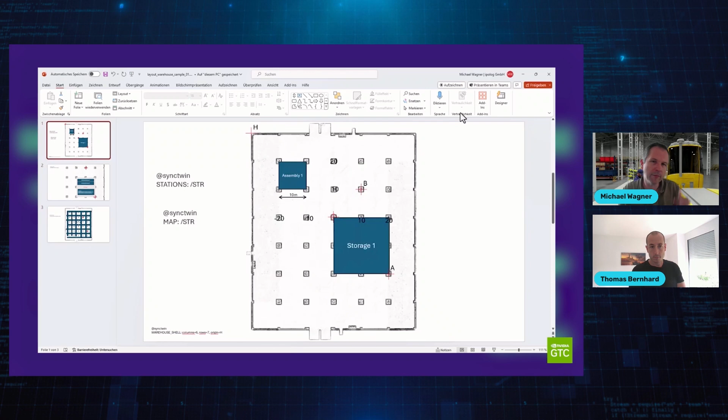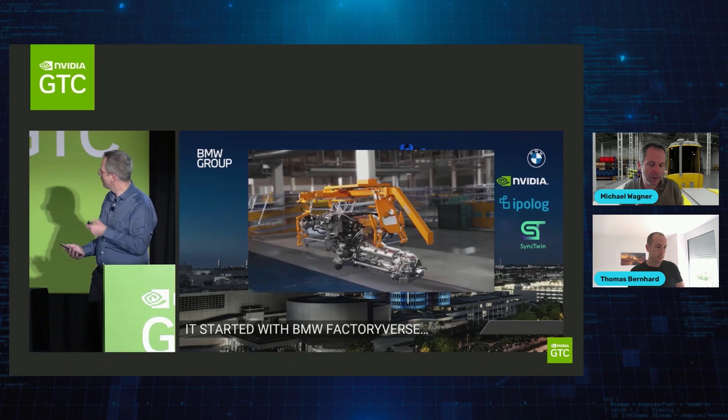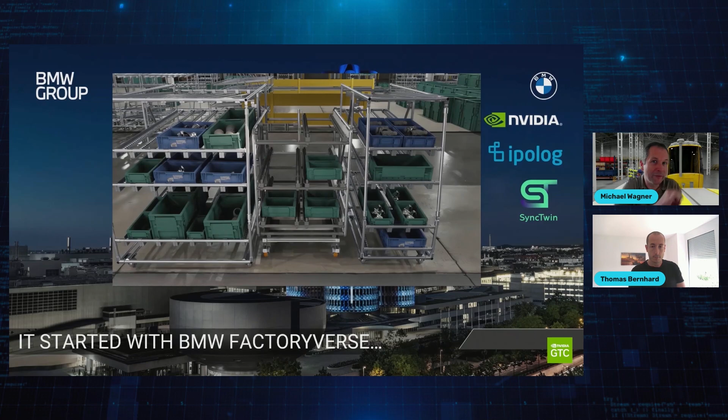GTC was great to see the adoption of Omniverse and the OpenUSD based workflow. As you all might know, Siemens was showing this big ship visualization. We had Amazon, Continental, and all the big players presenting their efforts, and it was great to see the adoption, but also the OpenUSD based workflow, and Aaron Luk got great insights about that. Something I'd like to add, because you always see the nice graphics, but it's just the tip of the iceberg, because the actual great thing is the OpenUSD structure and all the assets based on OpenUSD.

We presented there and launched our SyncTwin app. To give you a little insight, I'd like to re-show our video where we presented the vision of where we want to go, also with the AI assistant. Let's have a look.

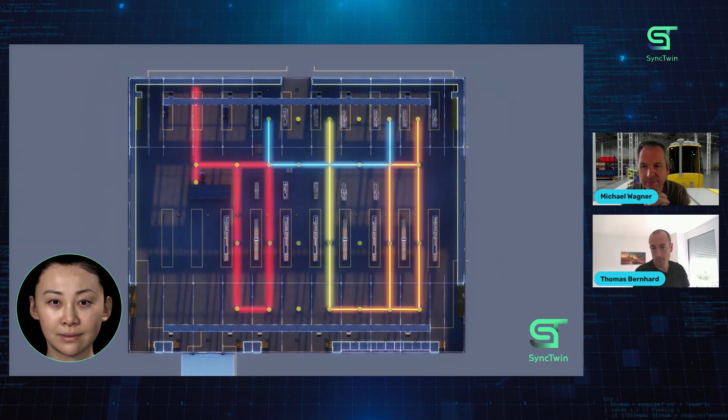Hi, I'm Lucy, your digital twin AI companion. The SyncTwin app, powered by NVIDIA Omniverse and OpenUSD, is your key to next-level digital twins like that one. Simply drag and drop your PowerPoint floor plan and Excel data into the app and see how your factory evolves. Need something specific? Just ask. For example, Lucy, create a pallet rack. Or, please add forklifts and loading units. Optimize your processes with tools like NVIDIA cuOpt, streamlining operations to deliver real value from your digital twin, to make smarter and more efficient decisions. Or dive into VR and become one with your factory, to understand and engage with your operations on a whole new level. Do you like to know more about what I can do for you? Connect with us on LinkedIn, Discord, our website or download the app on our store and get started. Together.

Yeah, I still like it a lot. I might add, this whole video was done in Omniverse, and actually the guy who did it was Thomas. So Thomas, could you tell a little about what components did you use? How did you do it?

Yes, sure. I mean, everything we built is on Omniverse. So the SyncTwin app is completely built on top of Omniverse, and we thought maybe just to video everything in Omniverse. For example, Lucy, the AI companion which I created, was done in Omniverse Audio2Face. It's basically a program where you can convert MP3 to movement of a face.

The whole creation process of the digital twin involved some work with the app itself to create networks, for example, or the animations where things are falling down, which are just timelines and event keys for when something should come down, and also the camera movement was automated.

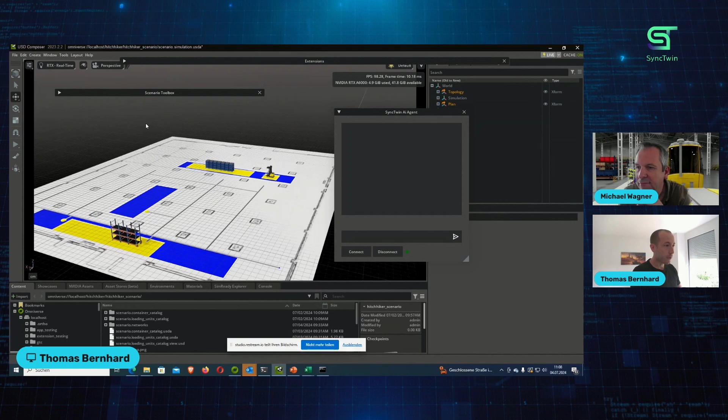Yeah, and I'd like to have Thomas share his screen. So as Michael said, the idea was that we use PowerPoint and Excel to create a digital twin, because everybody has it and everybody uses it. So I was thinking of just making a super simple example like this one, where you can see the floor plan in the background, and where you have the pallet rack generated with our pallet rack generator, adding some forklifts as 3D models, and some loading units and transport networks. So the idea is that we have different scenarios, and you have to put the files inside. And now I'm going to show you how a PowerPoint could look like.

So what we just have seen was the SyncTwin app. It's an Omniverse kit extension, so you can just download it from our web store and add it to your Omniverse Create, for example.

Now here in this PowerPoint, all you have to do is basically use your floor plan, which is PNG or PDF, load it into PowerPoint, and then draw some forms on top of it, which our software can understand. So it's a mixture of using forms and giving some commands. And with @synctwin, you tell the software, okay, now we want to communicate with our SyncTwin app. And for example, if you put this floor plan in the background, these different stations are added into the scene.

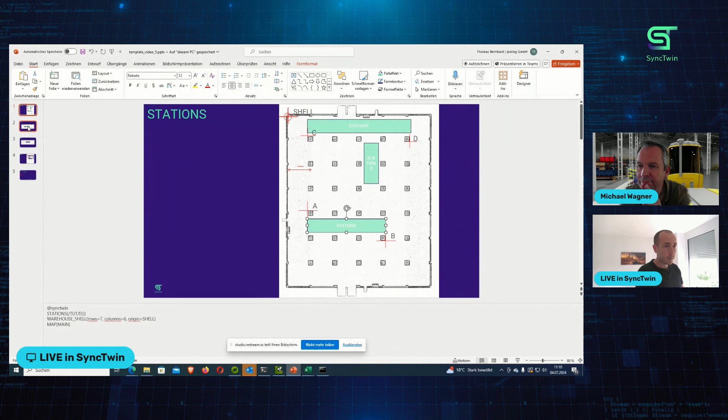Then, for example, if you want to add a 3D model like the forklift, just add a rectangle on the spot where you want it, and tell the location where you have it. It's in the nucleus, which is the base data storage for Omniverse. And then you tell where it should be, and this, for example.

And it's basically, if I may add, Thomas, you see this SyncTwin app as your assistant, and you basically talk to the assistant with your PowerPoint. So you tell this here and that here. And we'll see more of that later on as well.

Yes, and we are always trying to think about what would be the easiest way to actually get things into this USD format and into Omniverse itself.

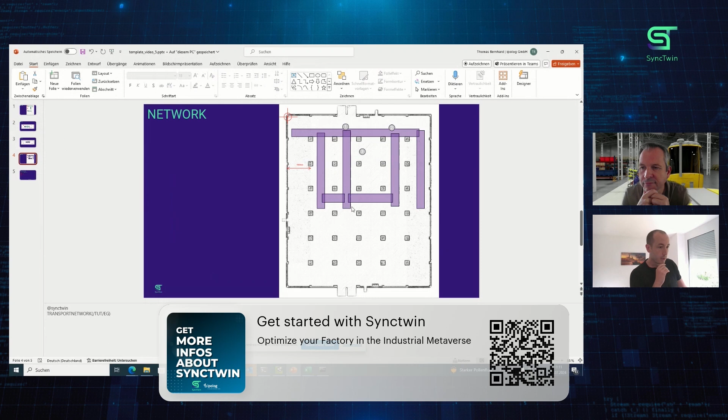For example, to create a network, all you have to do is take rectangles, put them onto the slide, and say, okay, it's going to be a transport network, and you can also add stop points with these circles. With this, you generate these transport networks, which can later be used as data for routing optimization, like with NVIDIA cuOpt, for example.

A further thing is creating pallet racks, like shelves. You just have a rectangle for the place where it should stay, tell it the name, and give the command: okay, we want to have a shelf, a pallet rack on the rectangle, and fill in all these parameters. With these parameters, the shelf would be generated, like the amount of levels or the height, these kind of things. So with the PowerPoint, you do a lot of placement of stuff, and where something should be and should be located.

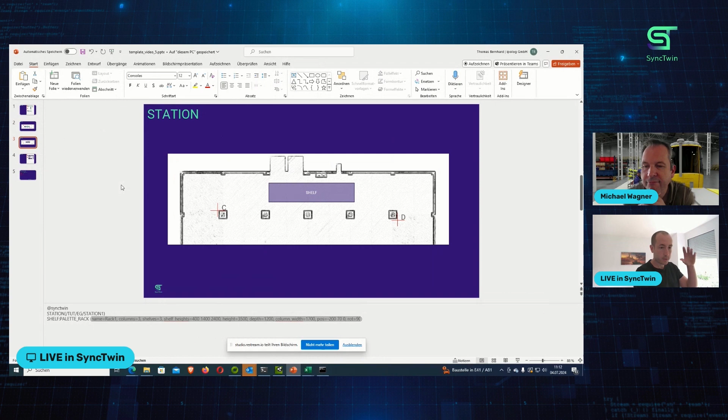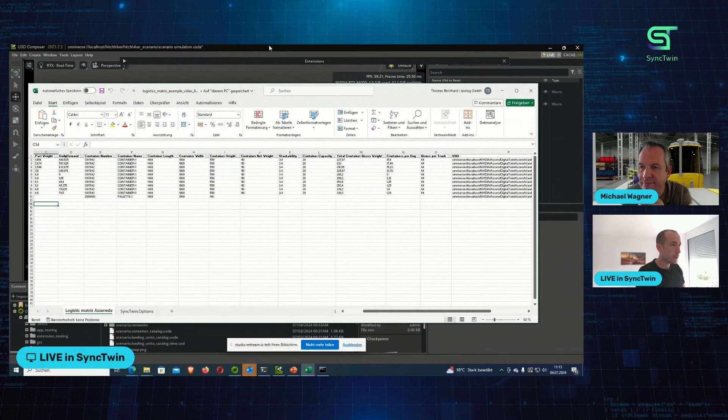You can also add Excel files into the Omniverse app. Just load it here. The Excel files look like this for loading units, like parts and containers. It's really simple data. We also have this example data in our tutorials if somebody's interested.

Then you can load this information inside the Omniverse app. You can also have a look for the containers, for example like here, and have a look at the different models and your data.

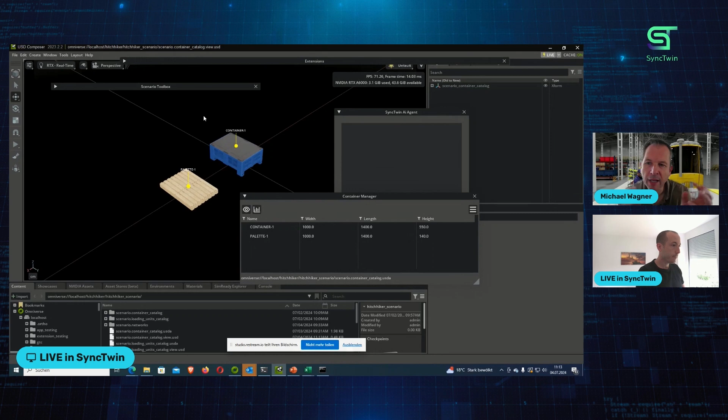The idea is to get the data in from whatever source you have and transform it into USD assets. So what we see here is basically the information about two containers, but also it uses template elements from Omniverse to create the visualization on top of it.

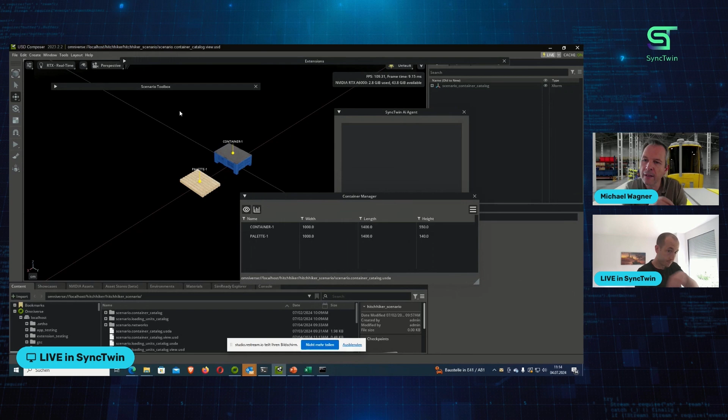So we see this is a pallet, this is a container, and so on. Both are basically in USD asset form. We can get the information about the container type or size, and the graphical representation, and we can combine this furthermore.

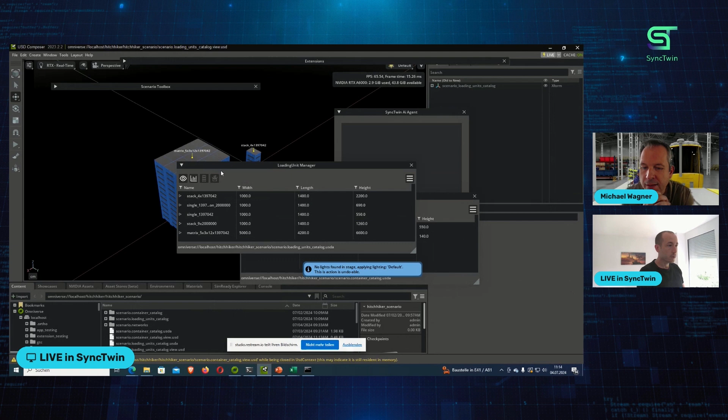The same is also true for loading units. It's like a combination of these different containers we have here. These are, for example, stackings of different containers, or a container on a pallet rack, or pallet racks stacked on top of each other, like here.

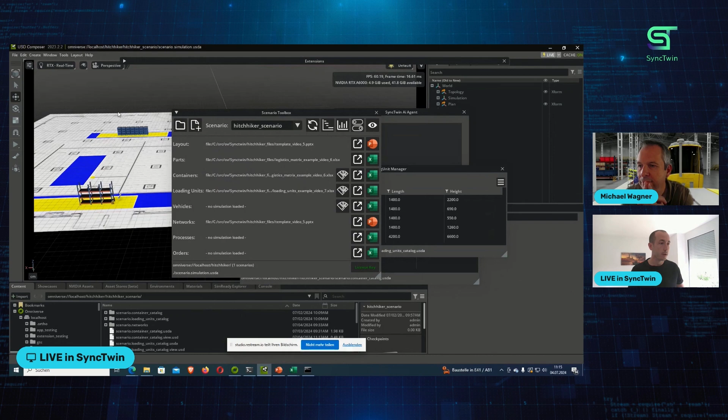You can then take these different stacks and put them also onto this floor plan, like we did here. I did it in the PowerPoint. On the slide I define this row, say there's a buffer, and give the location for the created matrix stack, and tell it how many rows there should be.

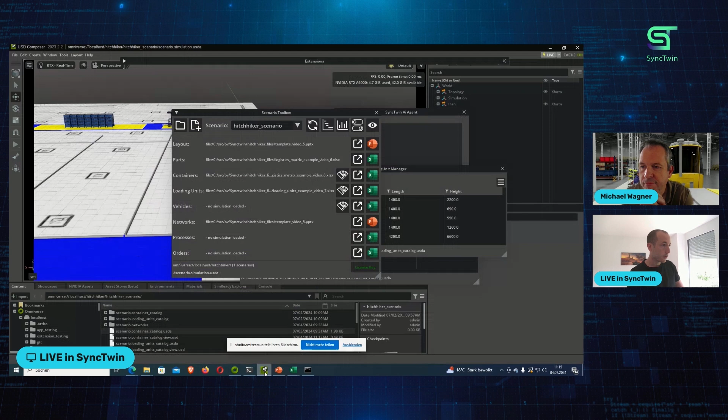The next step would be that I'm going to show you how the AI assistant works. So Thomas, maybe one thing — we have a question in the chat about if that's also possible with other sources of information.

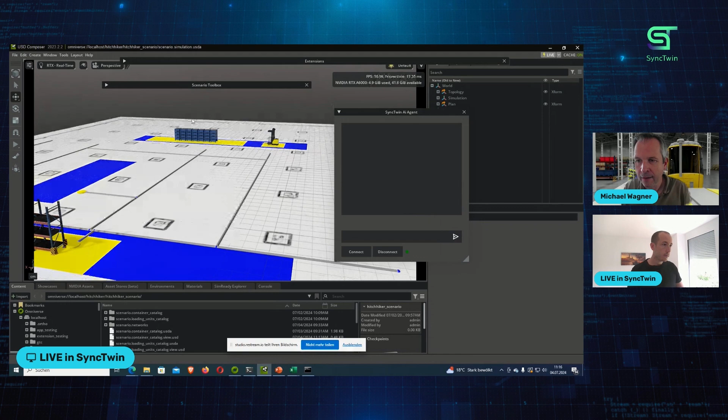Sure, we put together here a digital twin pipeline, basically consisting of sources being transformed into USD components and being consumed by other services in the Omniverse, or applications in the Omniverse ecosystem. For us, it was just the idea to make the most simple start using what's on every PC — Office files. But you've also seen there are different domains.

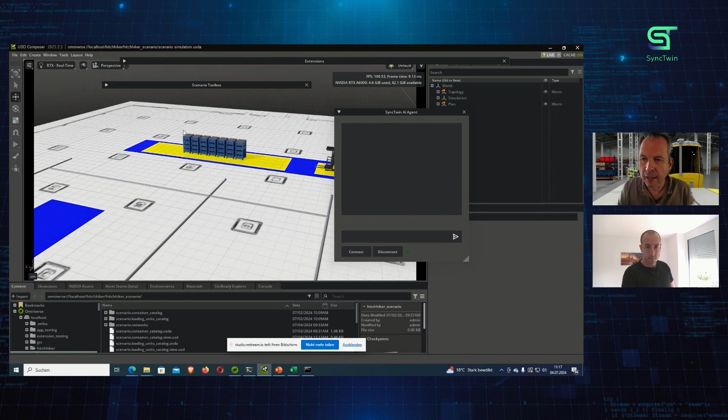Topology, as you asked, Amar, is basically just one element, and you can pull it from somewhere else as well if you have a system database or whatever. As soon as you've created an OpenUSD component with the respective metadata — I'll show in my part — then you can use it.

This is just to get started, so if you have nothing, you probably have an Excel and a PowerPoint or a Visio file, which we also use. The next thing I'd like to show you is the SyncTwin AI assistant.

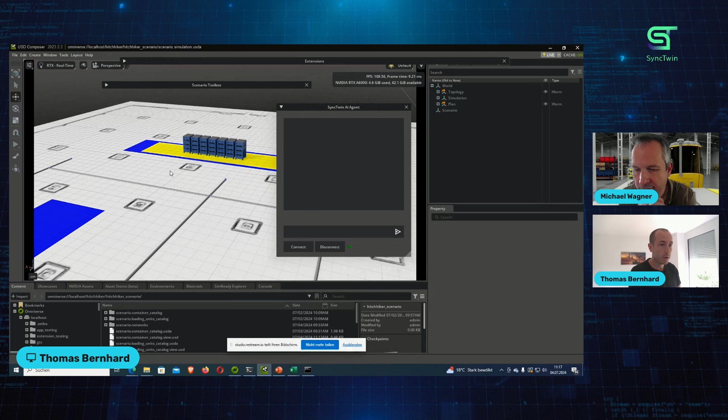We thought it would be a good idea to also use AI to make it even simpler to create digital twins, or talk to a digital twin, for example for some analytic tasks. A really simple example would be to count these containers, how many there are in this scene — because there could be many, so we don't have to count them ourselves. We just use an assistant and ask it how many containers there are.

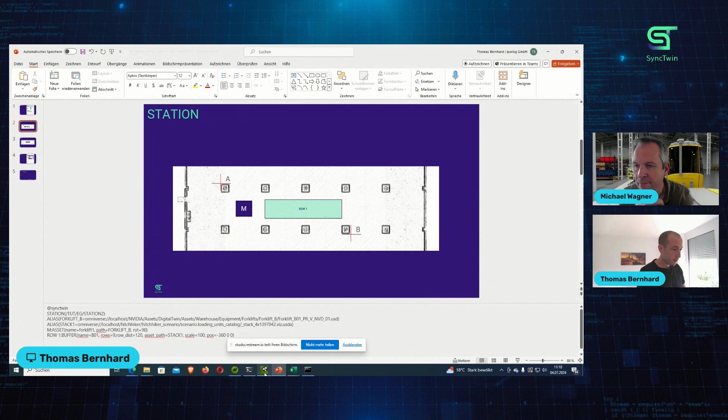The assistant called the function himself and counted the containers. When I now change them, for example instead of 7 rows I make 9 rows, I save the file, go back, and refresh the scenario — and here you see it's a pipeline. So whenever the source changes, everything derived from it changes as well once you recreate it.

And when I ask it again, I can also tell it something different — it's not always the same string, so it understands the context of the question.

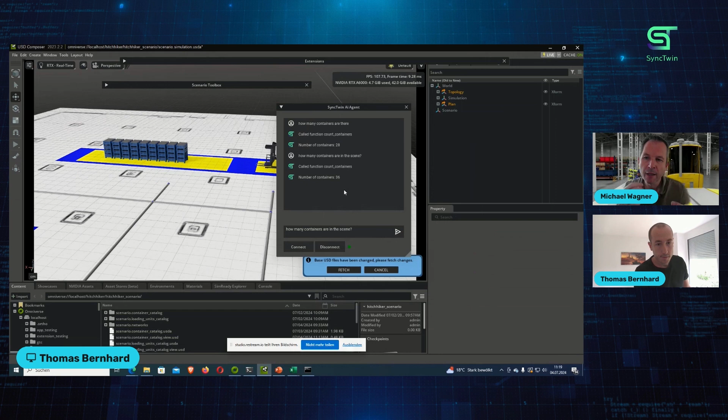Then it's going to tell you that there are now 36 containers in the scene. This is possible because we not only have the graphical representation, but also the semantics. So a container knows it's a container, and the AI, by traversing the scene, can basically look for the right elements.

So yeah. Thank you, Thomas. Yeah, sure.

Now that we have created our initial setup, and time just flies when you talk about interesting things, we want to now show how, if we have an expert tool like ipolog, we get information out of our created scene.

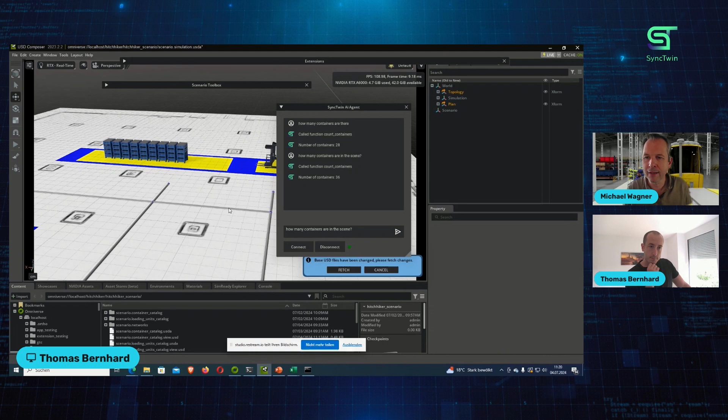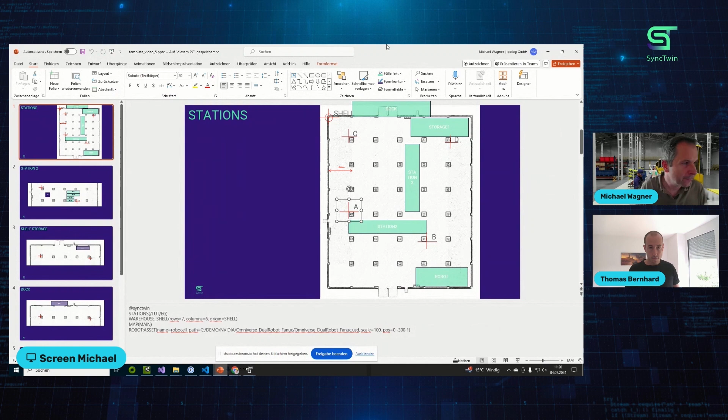Now see here's the PowerPoint as well, right? And the interesting part here, I've also got these points of interest, A, B, C, shell. These are elements in PowerPoint which also reflect some scene element, because I've created this.

So here in topology, I've got the points of interest as USD elements, and our point A, for example, is here an X form. But it has also metadata, because the most important thing is this schema attribute, and by adding this, it's all automatically added. We know it's a point of interest, right?

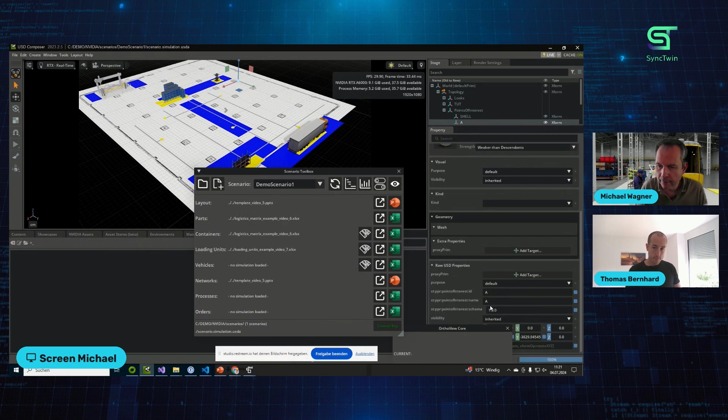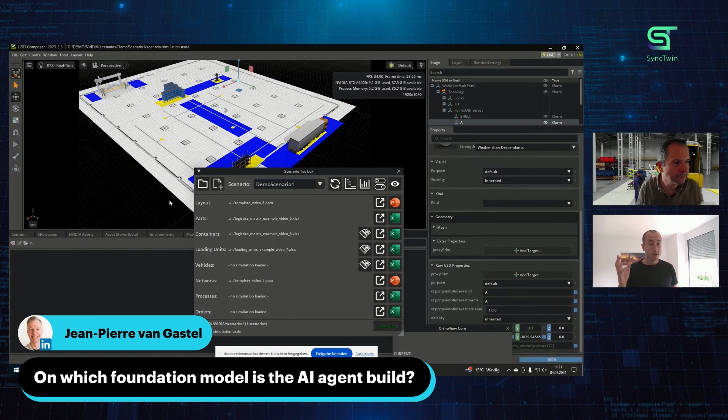Maybe one question was, on what foundation model is the AI agent built? We've got maybe Thomas, you can quickly answer. Yes, sure. We can decide if it's going to be a local model like Mistral 7B, for example, on your computer, or OpenAI GPT-4. But we're also using some smaller models to make the decision process faster for what to use.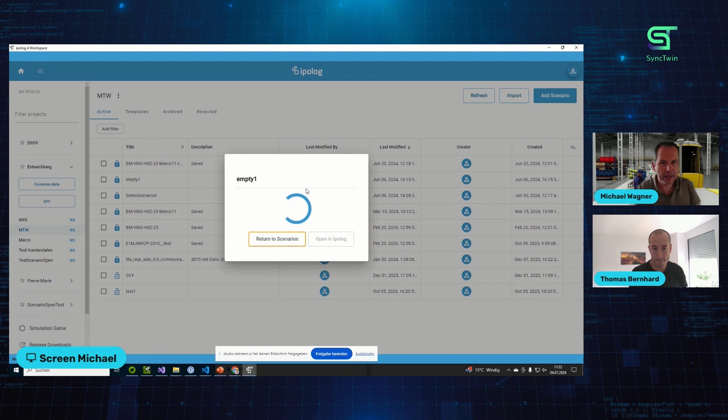Yeah, but so far, by continuing, now keep in mind the points of interest, right? So now I'm changing to ipolog, and in ipolog I don't have anything yet. As well, some colleague has already pushed the data into the nucleus, this initial layout, and I'm starting with an empty scenario.

As you see here, we've got a connector to Omniverse using the Omniverse ipolog connector, which is this. In an episode before, I already showed how to push data from ipolog to the Omniverse, but here's the other way around, I didn't show that yet. So we can push things and we can pull in things from Omniverse.

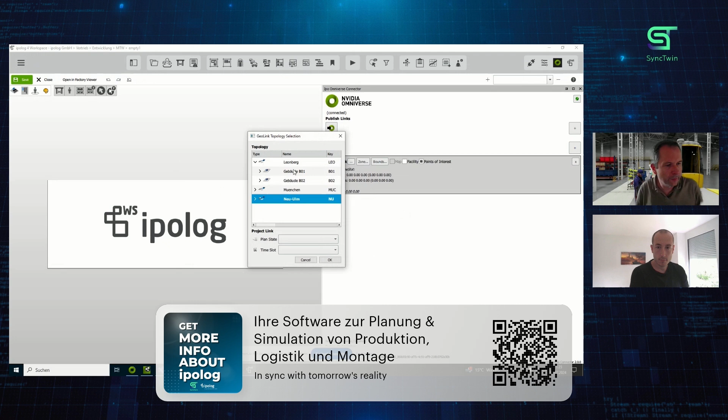So I add a geolink, and what we have basically here is a selection of the topology. So here I know that it's in our Neu-Ulm location, the scenario I'm interested in, but I could also pull in some Leonberg, the other facilities from another location. So here I'm telling it to use this.

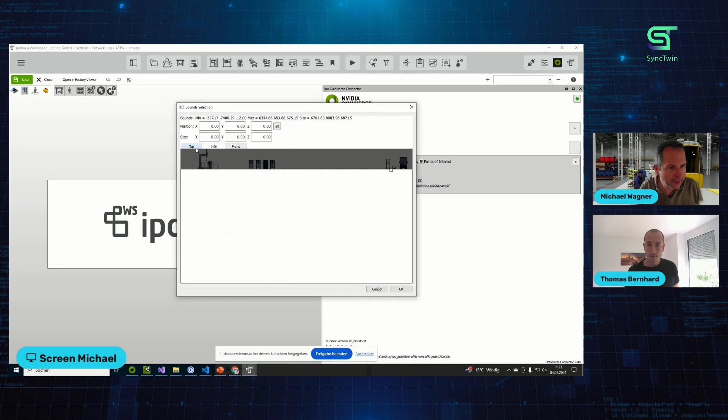And also what we can do now, we can go into the Omniverse, and we had some services creating overviews for this connection. So if I go to bounds, you see it has created a 2D map of my scenario. Keep in mind, here's the robot station, here's the truck, and now I can tell what I'm interested in.

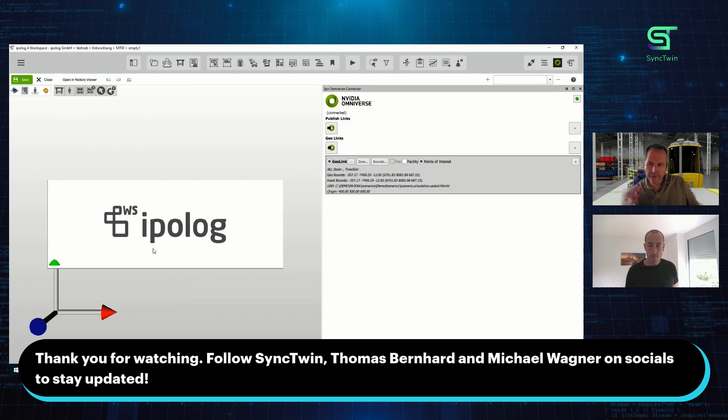Maybe say, okay, I want just this area, but we are interested in everything, and we've got several possibilities to pull in content, but today I just want to pull in the points of interest, because this is always a problem if you want to connect these different systems. What are the reference points, right? So I just do a pull, and it has now gone to the Omniverse scene and pulled in the points of interest.

So here is one, right? The shell. If we look into our tag list editor, we've got A, B, C, D. It's point of interest, and we've got basically the coordinates as well.

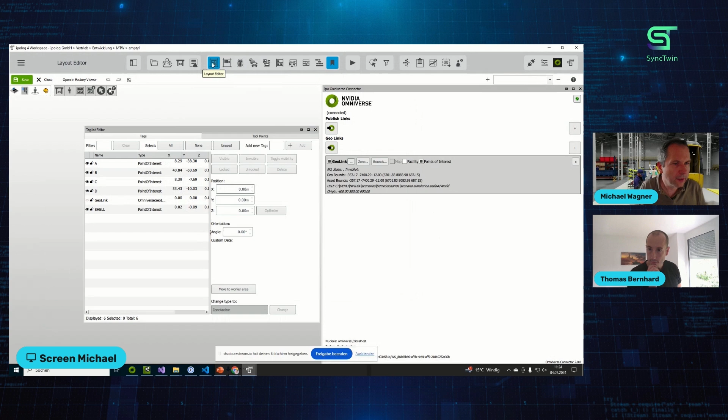So now we can open the layout editor, right? Let's put that aside, maybe here. And as you see, I do a view all. I've got my points of interest here ready to be used, right?

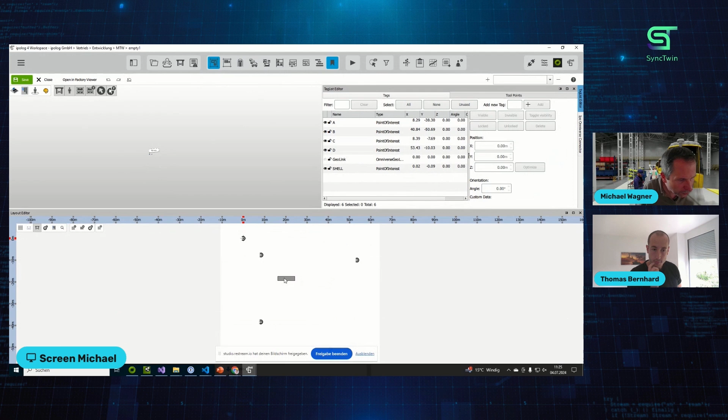And so I'm adding a new area, like a material area, my material, whatever, right? So create, and let's put it here. And so now I know, yeah, it's basically at this point of interest C. Let's maybe move it as well and dock it here maybe. Yeah.

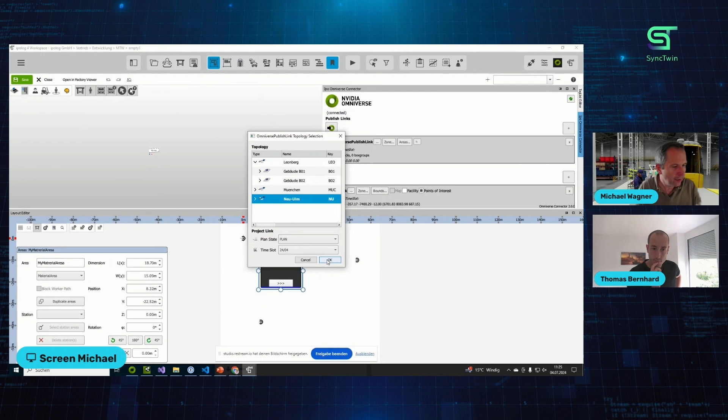So and now I've done my initial area planning, right, in ipolog. So I can now use the publish link to push it back, and so I just have to tell again which zone, it's Neu-Ulm, right? For this I have several other possibilities to push it into a certain time frame or a certain variant, I don't go into that in depth, but we see we've got one area. We push it, right? So now we pushed our area back into Omniverse.

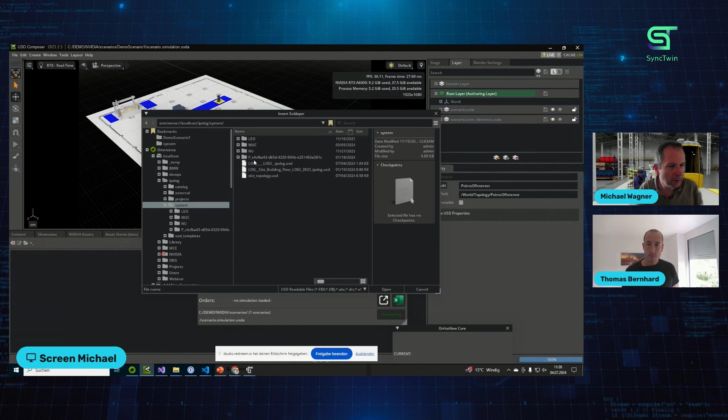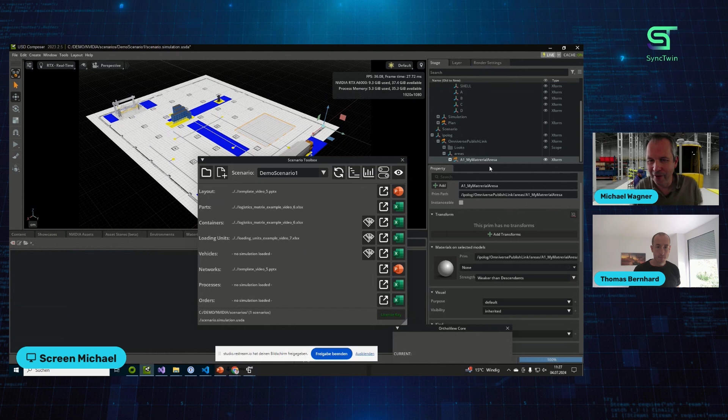So we see here basically the areas and our points of interest. Let's go back to our scenario. And here is a great thing of OpenUSD, the layering. We can add our ipolog layer, and this can be done automatically, depending a little on your environment. This is the USD file we created with our Omniverse connector. If I add this as a layer, it's basically put on top of the other things. What we see here is our ipolog area from the publish link, basically my material area, with the same error as well, since it's from my example. This shows the whole loop of interaction between an expert tool and the other things on NVIDIA Omniverse. Yeah, this is basically what I wanted to show you guys.

Maybe to wrap it up, Thomas. Can we show the? Yeah, there we go. Yeah, that's it.

I think it's very easy to work with Omniverse and the OpenUSD things, but initially you have to get your head around it a little, right, Thomas? What was your experience getting to work with it?

Yes, sure. At the beginning it was a little bit difficult because OpenUSD is not something we use every day, but for me the analogy is like the layering in Photoshop for pictures, or it's the HTML for 3D worlds and stuff like that. That helped a lot to get my head around OpenUSD.

But just go and start, make a project in Omniverse. It's getting easier and easier to work with it. You have to really say that the NVIDIA guys are putting a lot of effort into it to make it more accessible and work a lot on the documentation. That's really great to see, I guess.

So, are there any other questions? I think we have answered all of them, right?